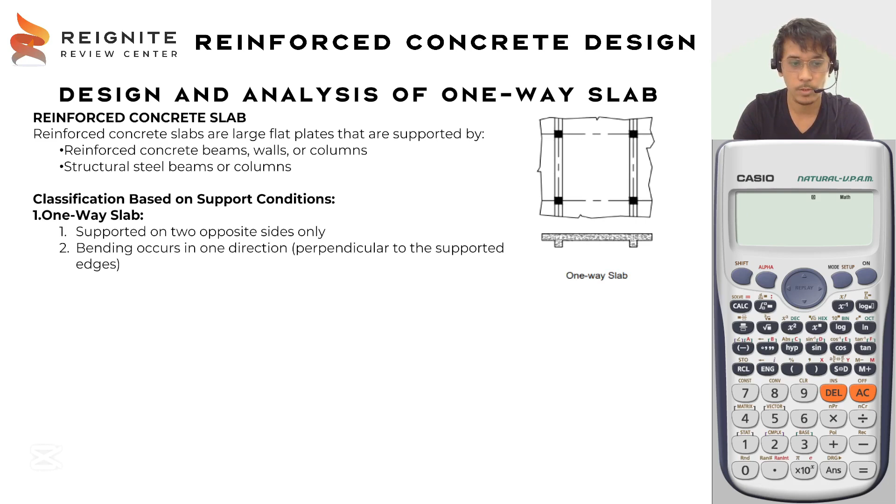These are classified based on the following support conditions. So we have what we call a one-way slab, which is supported by two beams only. If the slab is supported on two opposite sides only, so on this side and that side, or on this side and the other side, we call it a one-way slab. And if bending occurs in one direction only, which is perpendicular to the supported edges, that is also a one-way slab. So the bending is like this, it bends here, same here, it bends there. So that's how it is for a one-way slab.

Now for a two-way slab, if the slab is supported by beams on all four edges, we call that a two-way slab. But not all slabs supported on four edges are two-way slabs. Sometimes it's still a one-way slab, depending on the length of the longer direction or longer span of our slab. So when it's a two-way slab, the bending occurs in both directions, meaning we have bending here and bending on the other side as well.

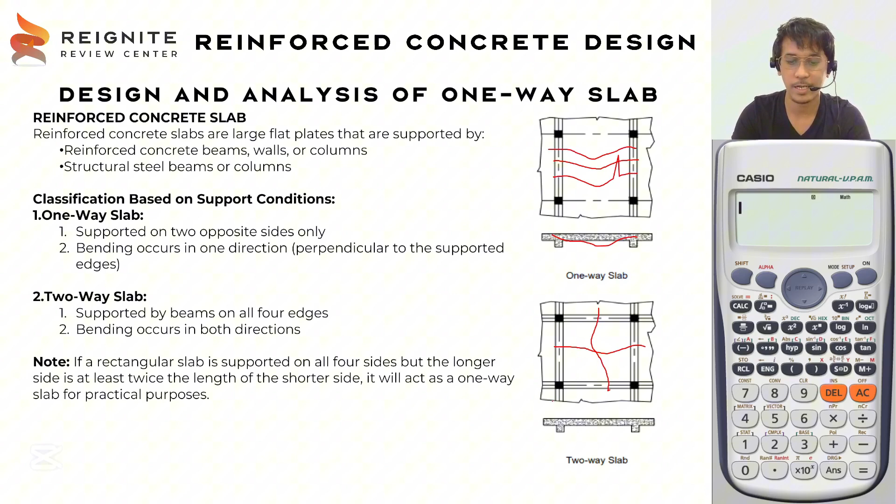I put a note here because, as I mentioned, it's not always a two-way slab when supported on all four sides. If a rectangular slab is supported on all four sides, but the longer side is at least twice the length of the shorter side, it will act as a one-way slab for practical purposes.

So our condition is, when the ratio of L to S is greater than or equal to 2 - meaning we divide the longer span by the shorter span and the result is greater than or equal to 2 - the slab will act as a one-way slab. But if the ratio of L to S is less than 2, the slab acts as a two-way slab.

So I just put here the meaning of L and S: longer span length and shorter span length.

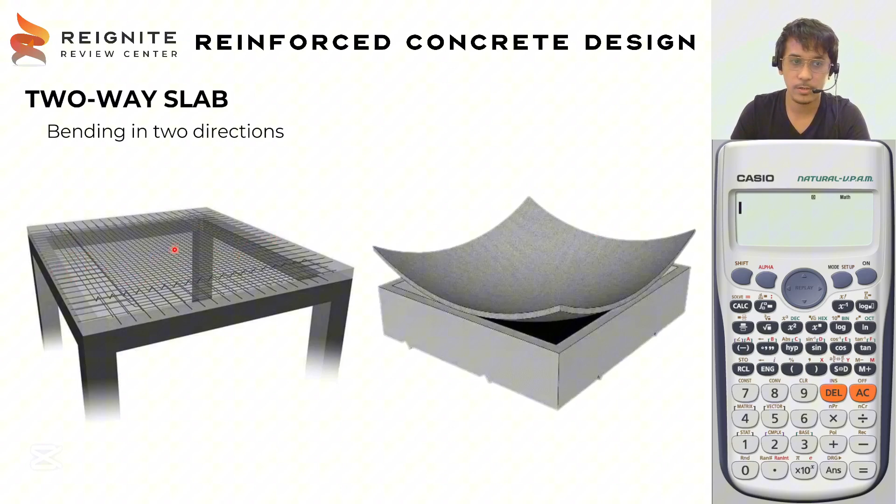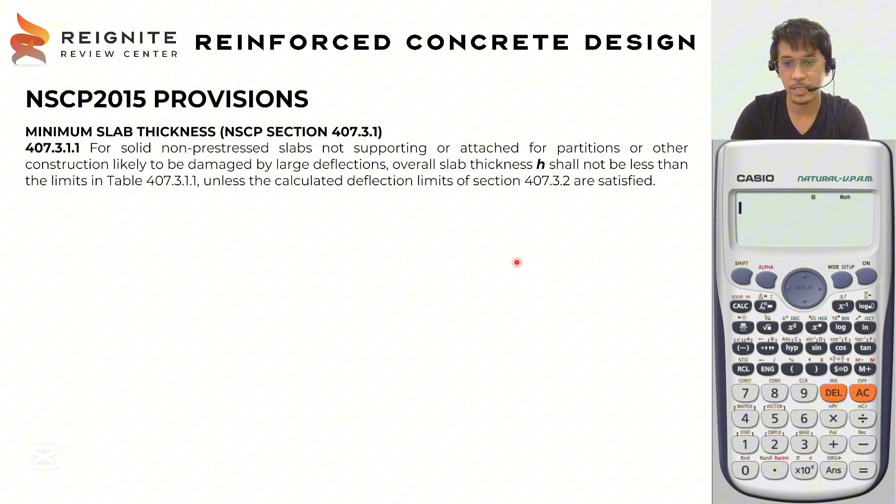Next, let us now discuss how to get the thickness of the slab. According to NSCP 2015, for minimum slab thickness: for solid non-prestressed slabs not supporting or attached to partitions or other construction likely to be damaged by large deflections, the overall slab thickness H shall not be less than the limits in the following table, 407.3.1.1, unless the calculated deflection limits of section 407.3.2 are satisfied.

So what's in that table is this: minimum thickness of solid non-prestressed one-way slabs. Then we have the support conditions and the minimum H or minimum thickness. When the slab is simply supported, meaning there's no continuity on both sides, or no adjoining slab, we use L over 20.

Now for one end continuous, meaning there's an adjoining slab on one side only, that's L over 24. For both ends continuous, meaning the slab has continuity on both sides, we use L over 28. And for cantilever, we have L over 10.

Take note, our L is equal to the center-to-center distance of support when considering these three classes. For cantilever, we use something different, which I'll discuss later. Also take note: this expression is applicable for normal weight concrete and Fy equals 420 megapascals only - meaning you'll only use this table for normal weight concrete and Fy of 420 megapascals.

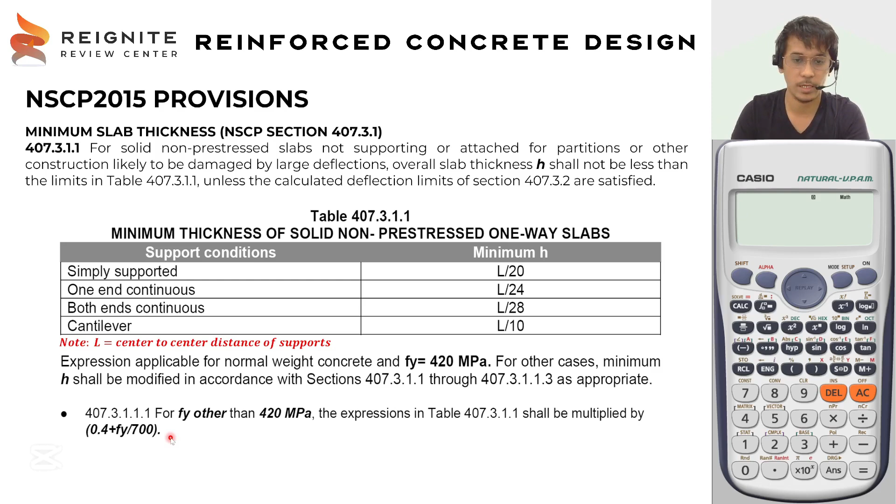So according to 407.3.1.1, for Fy other than 420 megapascals, the formulas shown shall be multiplied by 0.4 plus Fy over 700. Okay, so let's try some problems before we continue our discussion.

So let's try this problem. First, the problem asks us to determine if slabs 1, 2, and 3 are one-way or two-way slabs. Take note, given are our values for S1, S2, S3, and L1, L2, L3. Also given are F prime c and Fy equal to 280 megapascals.

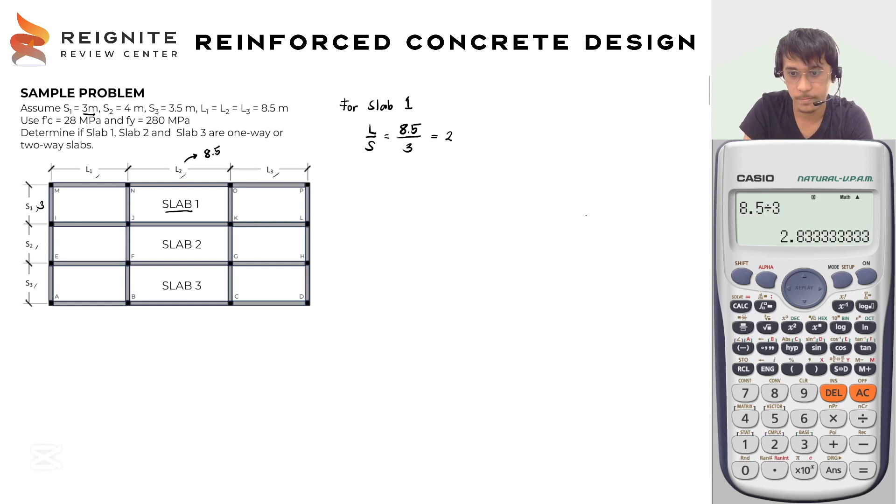So let's compute for slab 1 first. To determine if the slab is one-way or two-way, as I said earlier, we take the ratio of L to S. For slab 1, our L is 8.5 and our S1 is 3 meters. So calculating for the ratio of L to S, we have 8.5 divided by 3, which gives us 2.833.

So that's a ratio, it has no unit. As I said earlier, if the L to S ratio is greater than or equal to 2, therefore our slab is one-way.

Next, for slab 2, the L to S ratio: L is 8.5, and for slab 2, S2 is 4. So 8.5 over 4 equals 2.125. Since this is greater than 2, it is still one-way slab.

Next, for slab 3, our L to S ratio: L is 8.5, and S3 is 3.5. So our answer here is 2.429, which is still greater than 2. Therefore, it is still a one-way slab.

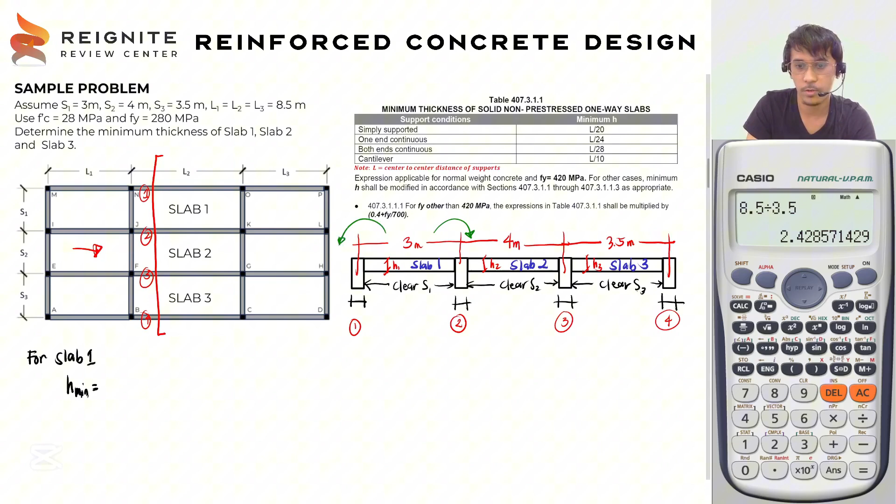Okay, to determine the thickness, our minimum H for slab 1: for slab 1, you'll see it's connected to the adjacent slab on this side, but on this other side, there's no slab in this portion. Therefore, it falls under the condition of one end continuous. So for one end continuous, we will use L over 24.

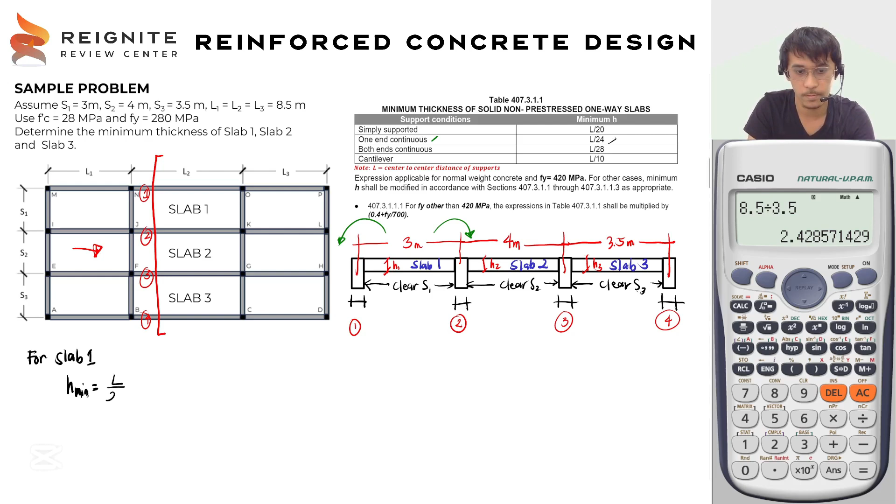Take note, the expression is applicable for normal weight concrete and Fy equal to 420 megapascals. So you have to check muna kung anong Fy. Dito sa case na to, ang Fy natin is 280 megapascal. Therefore, hindi applicable na ito lang yung gagamitin natin.

If you try to calculate, kung yung Fy natin ay 420, yan. Ang sagot dito kasi, ang mangyayari kasi diyan ay, 0.4 pa-plus natin siya sa Fy natin which is let's say 420 over 700. So dito ay meron tayong 1.0. Ibig sabihin, kahit gamitin mo yan, kung 420 yung Fy mo, maka-cancel lang din siya, magiging 1 lang din siya. So dito, if Fy is equal to 420, yung expression natin na to will be equal to 1.

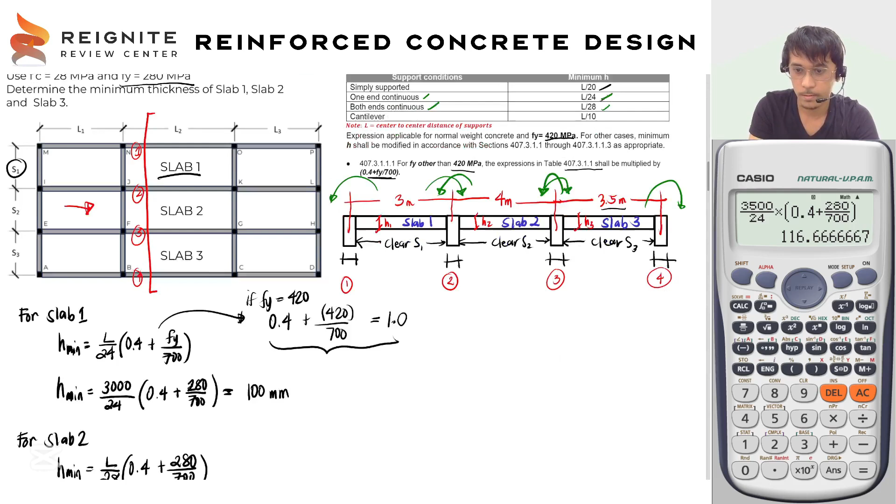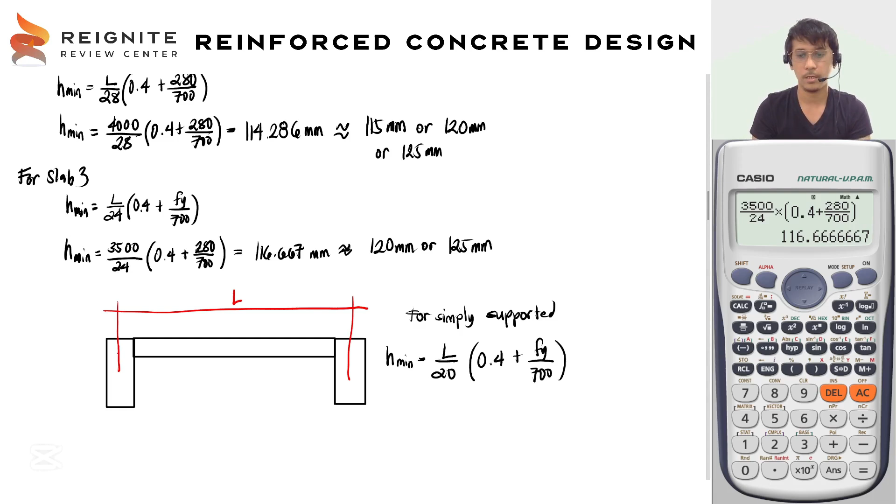Okay, so kung papasok siya sa simply supported, yun yung L over 20 as stated dito sa table natin. L over 20. Ito, okay? Times 0.4 plus Fy over 700, kung Fy is not equal to 420. Pero sabi ko nga kanina, kahit palitan mo lang to ng 420, kung 420 yung Fy, magiging 1 lang yung expression na to.

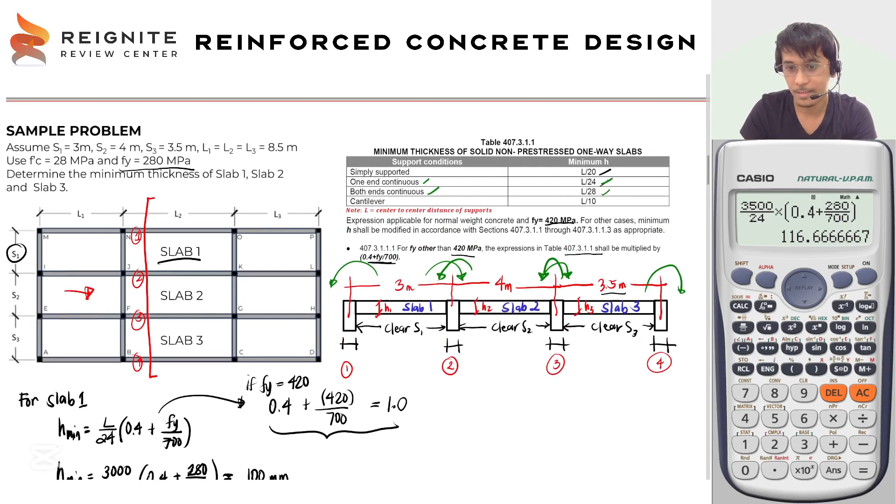Okay, and for cantilever, yung ating H minimum is equal to L over 10 as stated ulit dito sa table natin na ito. So L over 10 yan. And ganun pa din, meron pa din tayong multiply dyan na 0.4 plus yung Fy natin over 700. Okay, so yan, ganun lang kasimple yung pag-determine ng minimum thickness natin. That's it for calculation natin for minimum thickness ng one-way slab.